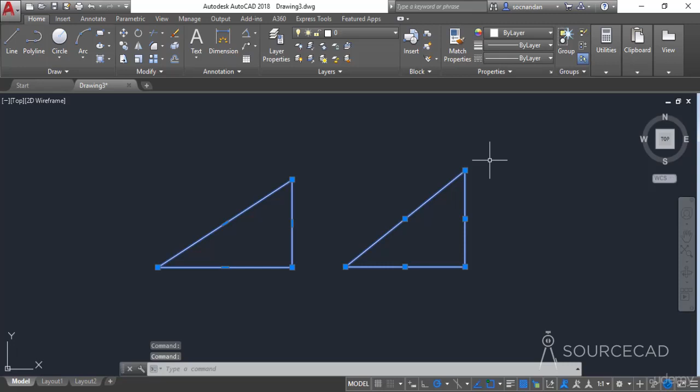Also, we have this additional grip, which is quite different from the grips which we have here on the polyline. And when you hover your cursor over the polyline grips, you'll see this additional menu, and we'll learn about this later on in this course. So that's one of the basic differences between a polyline and a simple line. In this case, the lines are quite separate from each other, and in case of polyline, they are combined into a single unit. Now let's erase them.

Polyline also has many other properties. So let's start this polyline, and now I'll click at a point to start the polyline, and now look at the command line. Here we have some other options related to the polyline. So I'll just click at the second point somewhere over here, and now I'll select the arc option.

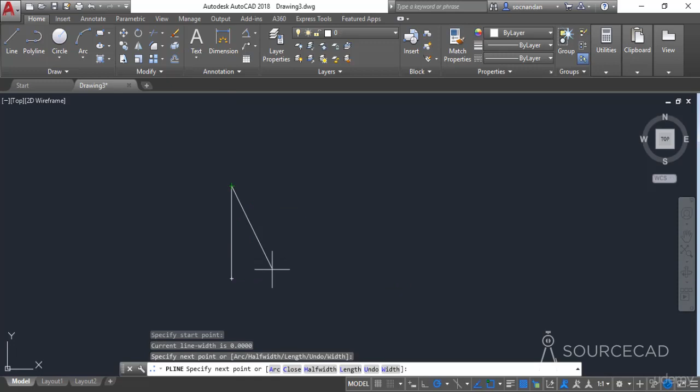So now once I select the arc option, you'll notice that the polyline now changes into an arc, and we can directly make an arc shape with this polyline, and now it's still in the form of an arc. So we'll return it back to the line, and for that you need to click on this line option from the command line, and now it's back to this line shape.

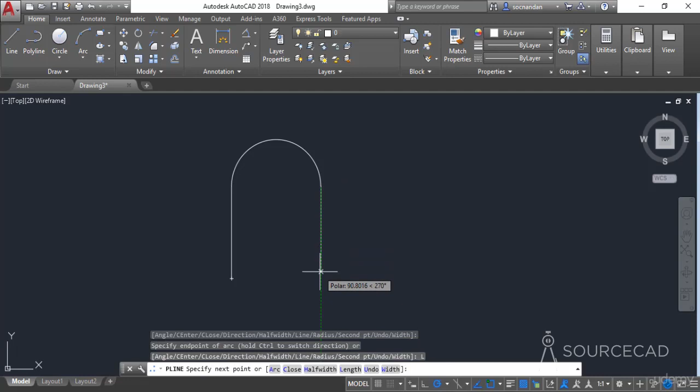So once again, I'll just drag this point and click here, and now click here, and here we have it. So using a single command, we can make this kind of geometry which has the line segment and also the arc shape, and the polyline tool can be used to make it. So now let's select this polyline tool and look at other options related to the polyline. I'll click at a point, and now look at the command line.

So here we have this option of half width. Let's select it, and now let's apply a starting half width of 10 units and press enter. And now here we have an option for ending half width. Let's select 10 also in this case, and now look at this shape. So now we are able to make this polyline but with a certain width, and this is the final shape of the polyline. So now the half width of this complete polyline is 10 units, so the complete width of this polyline will be 20 units.

So now let's erase this geometry, and I'll select the polyline tool again, click at a point, and now I'll change the half width value to 0 for both the starting and end width. And also we have an option of width here. Using the width option, you can enter the complete width of the polyline. So let's say that we want to enter a width of 20 units, so simply type 20, press enter, and the ending width also 20, and now we have the same results here.

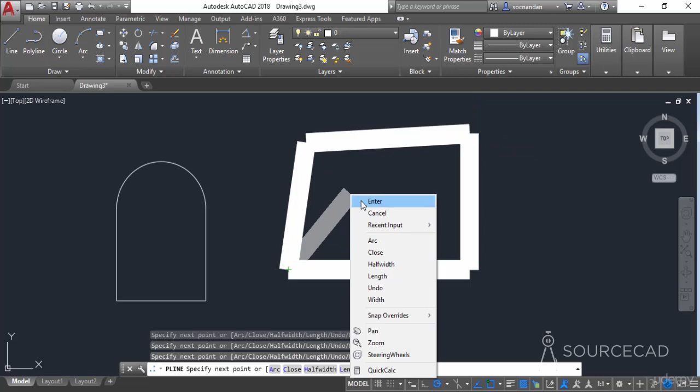So using half width, we applied a width of 10 units between the center line and the periphery or the extreme end of this thickened polyline, but in this case we were applying the complete thickness or the complete width of this polyline, which was 20 units. And here we have the final geometry. Here also you need to change these values to their default in order to have a normal behavior of the polyline. So now here we have the normal polyline.

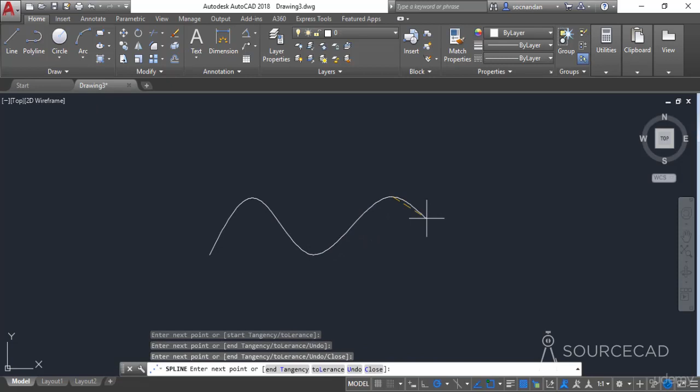Now let's look at the spline tool. Using splines, you can create some very organic shapes, and when you expand the draw panel, you'll see we have two spline commands here, the spline fit and spline with control vertices. So let's select the spline fit. Now we can click at a point to start the spline, then click at the second point, third point, and so on. So this is the spline shape which can be used to make many organic shapes in AutoCAD.

And now press enter to exit this command, and when you click on this spline, you'll notice that at the points where we clicked, we have these grips. So at every point where we clicked, we'll have this grip on the spline. Now let's make another spline with spline control vertices. So let's select this flyout and select the second option, which is spline CV or spline with control vertices.

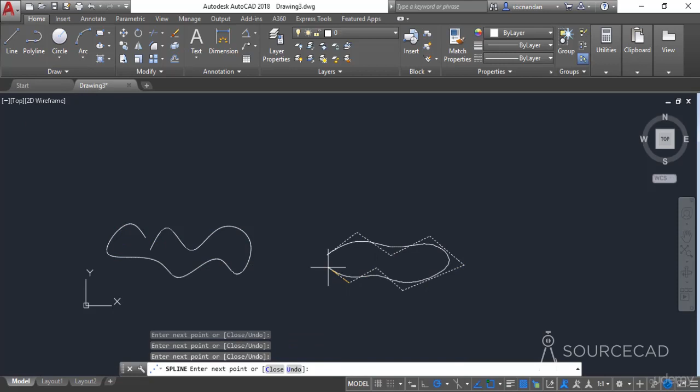Now in this case, I'll again click at a point and make the spline. But if you look closely, you'll find that the spline is made in a slightly different way. So now let's press enter and zoom into this spline. And now you'll notice that at all the points where we clicked we'll see this grip, and the spline is not touching the points where we clicked, except for the starting and end point. So we have clicked at this point, then this, and then this point.

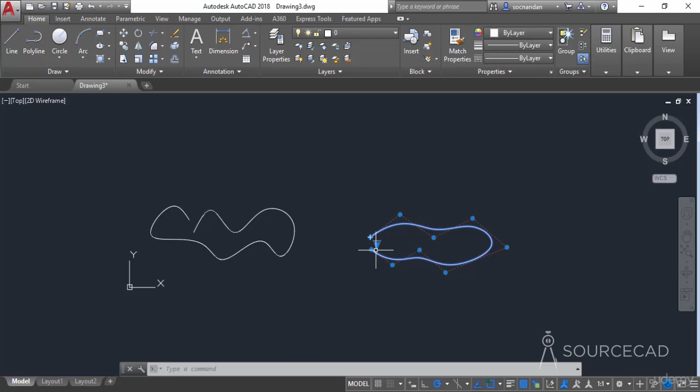Now, if you want to change the type of this spline, if you want to make it a spline of this type, then you can change it using this grip. So click on this down pointing grip and change it to fit. And here we have it, this spline fit. In a similar way, using this down pointing grip, you can change it to control vertices, just like this.

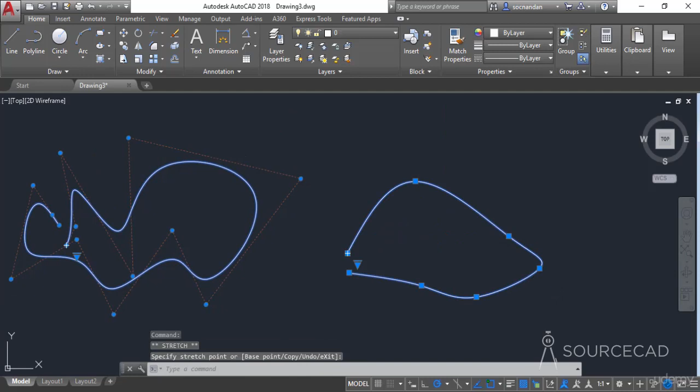If you want to change the shape of this spline even further, you can use these grips to change its shape. And using this control vertices spline, you'll have more control over the curvature or the geometry of this spline. And in this case also, you can select these grips to further modify the shape of these splines. So this was all about the polyline and spline commands of AutoCAD.